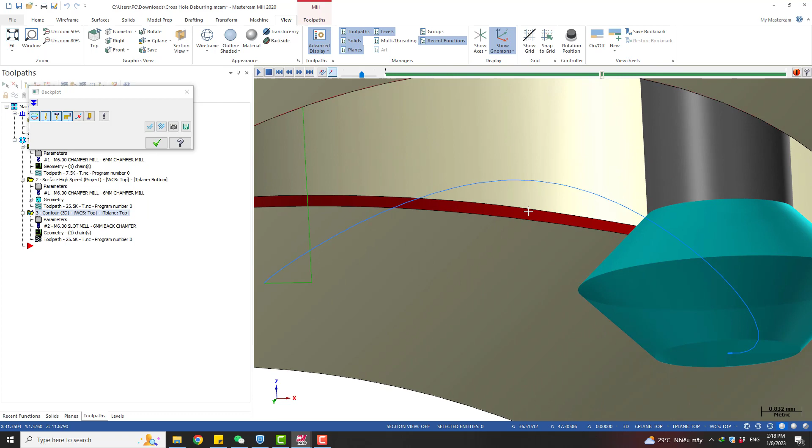I have another Mastercam video about cross-hole deburring, but on that video we used the lollipop cutter. Today is something different - we are not going to use the lollipop cutter anymore, but change to a back chamfering tool like this. You can see in this video I'm going to use a back chamfering tool, and it's going to cut like this, giving us a small chamfer here in red. This is what we want to get after we do the deburring operation.

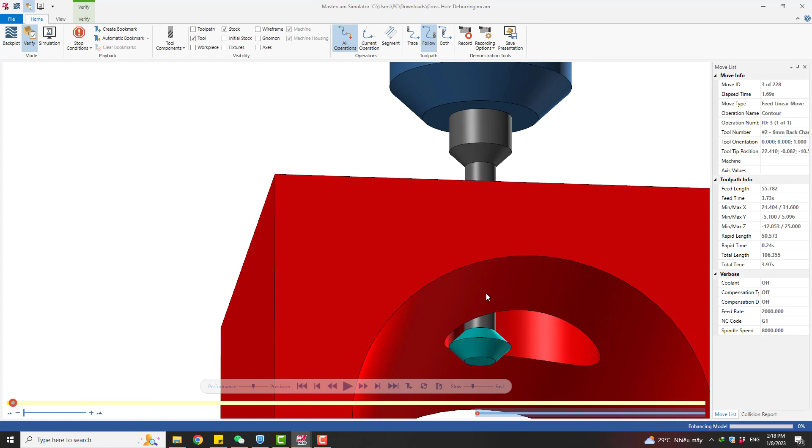Before we start, I can turn on the simulation so you can see how it works. This is the part and this is the chamfering tool, a back chamfering tool, and now I let it cut. Yeah, and this is what we get.

You can see the burr can be removed with this operation. We have a small chamfer here along the intersection between the holes.

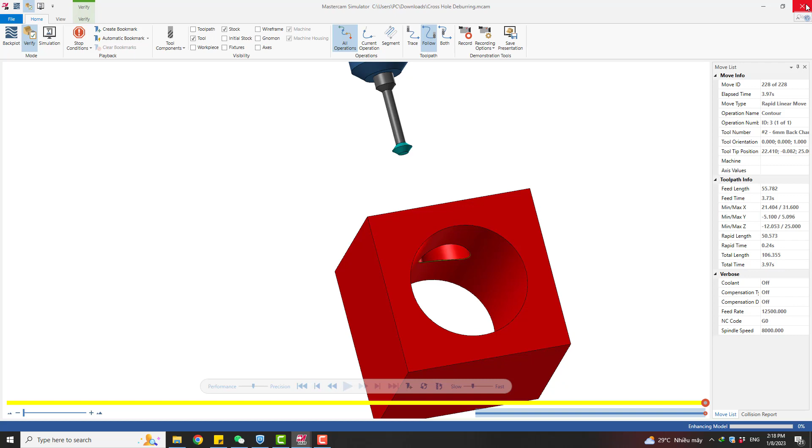We go to the level - I have something to show you first. Here's the level I use: the first level I start with has the part with the small chamfer, and the second level is the same part without the chamfer. This level I use for cutting simulation.

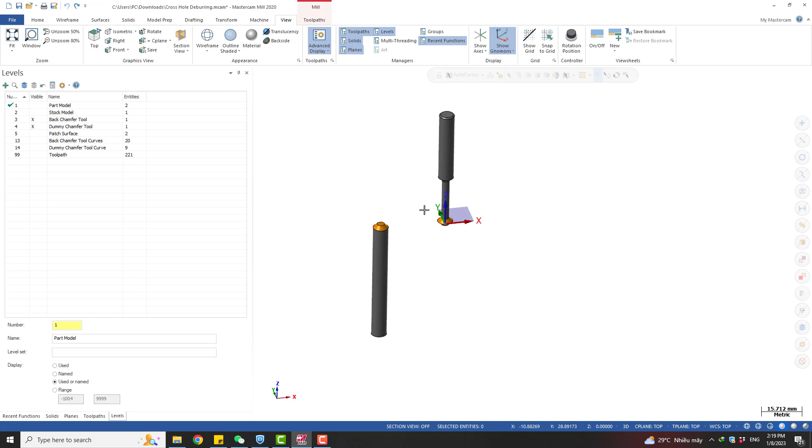On number 3 and number 4 I have two different tools. You can see on the right side I have a back chamfering tool - this is the real tool we use for the operation. And on the left side I have another flip chamfering tool with a flat tip here.

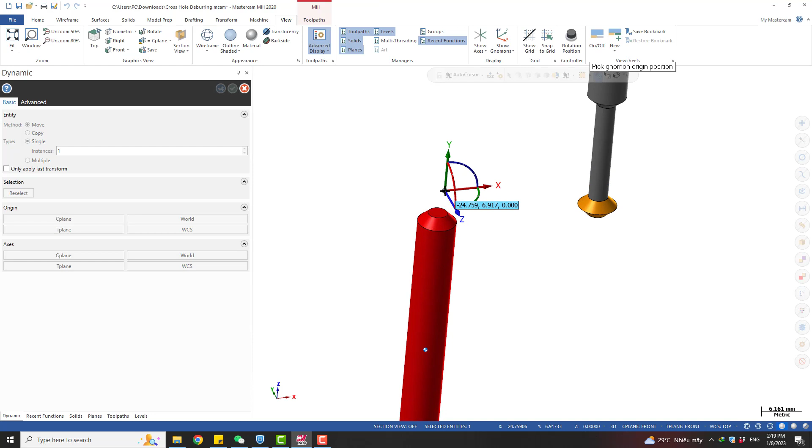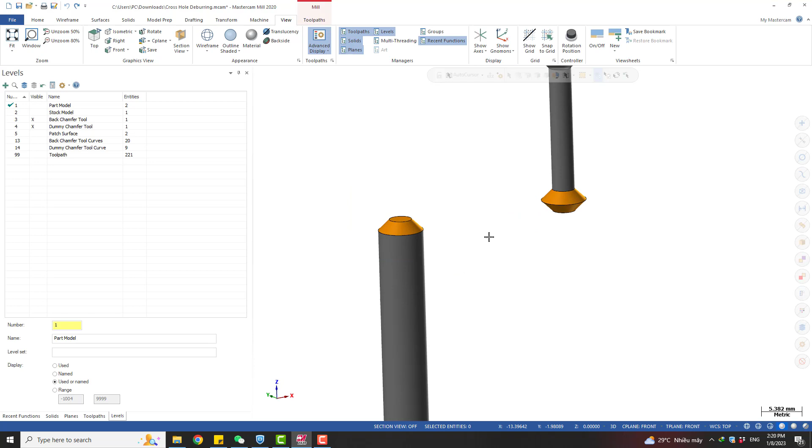Why do I need this one? I'm going to talk in detail about this later, but you can see when I merge this chamfering tool together with the back chamfering tool here. Did you see that? I turn on the wireframe so you can see. So I can say that the lower section of this chamfer tool is the same as the upper section of this back chamfer tool. You can see they are the same - the lower section and the upper section.

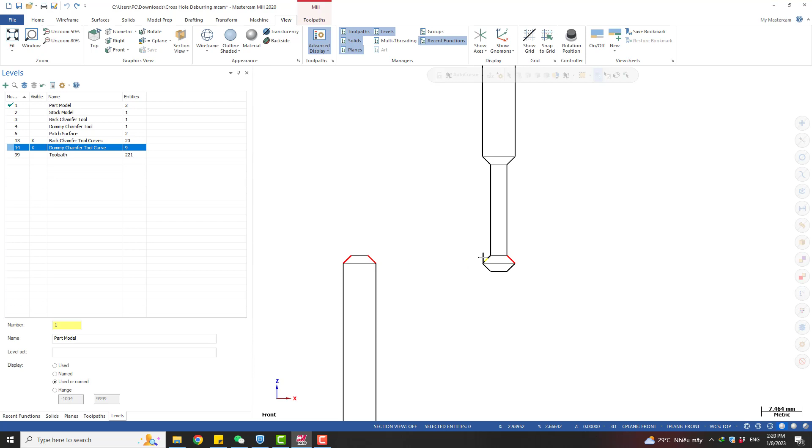I also have level 13 and 14, so you can see it clearly. This is the chamfering tool flip, and this is the back chamfering tool. This is the lower section of the chamfering tool, and it's the same as the upper section of the back chamfering tool. You can see it when I mark it here - they're the same.

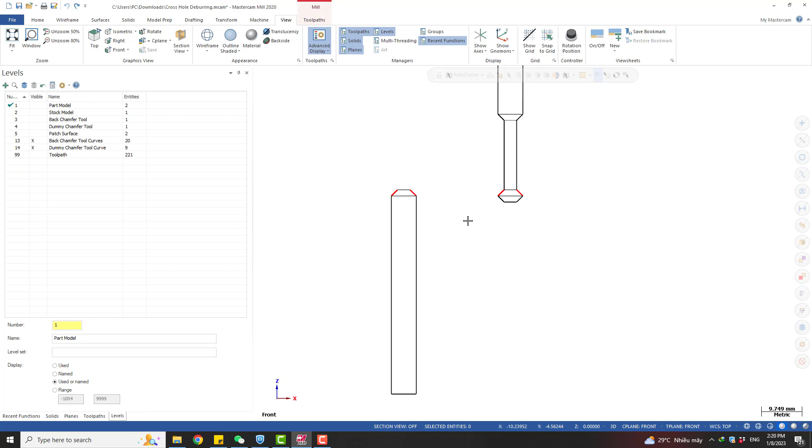Okay, I think so far you can see what I want to do now. I turn off them. I have another level, number 99, for storing the toolpath.

Okay, let's take a look at this chamfer. When you look at it from the top side, you can see it's totally undercut. That means you cannot reach it with a conventional tool. But try to look at it from the bottom and see.

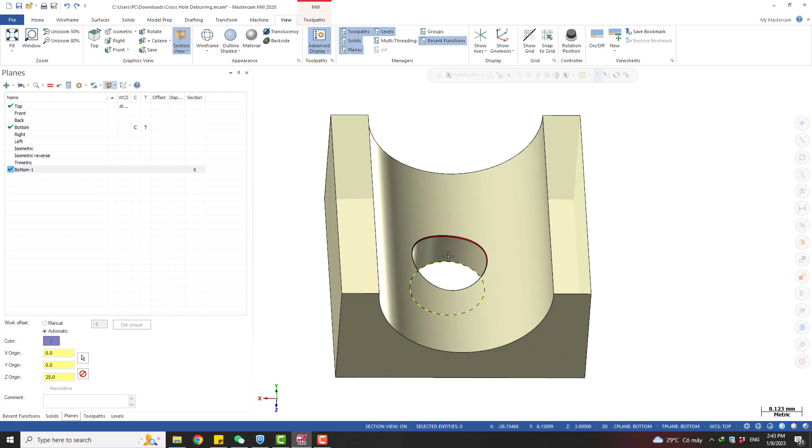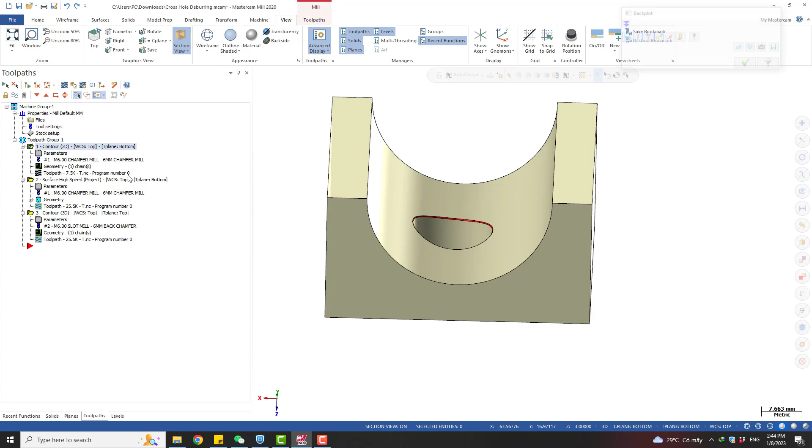Yeah, you can see that when you look at that chamfer from the bottom side, it becomes a normal chamfer, a 3D chamfer. That means you can cut it with a normal chamfering tool like this. Like what I did here - I made a 2D contour like this, and then I project this 2D contour onto this red surface using the same tool, and I got a 3D chamfer toolpath like this.

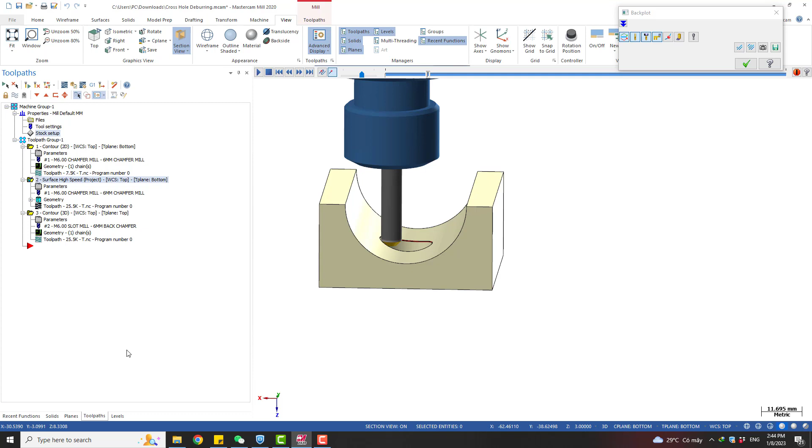You can see this one is the dummy chamfer I talked about before. I call it dummy because we just use it for calculating, and we are not using it in reality.

Let me show you again about that dummy tool. Yeah, this is the dummy tool we use - it's just a normal chamfering tool. Okay, and what we do with it is create this chamfering toolpath.

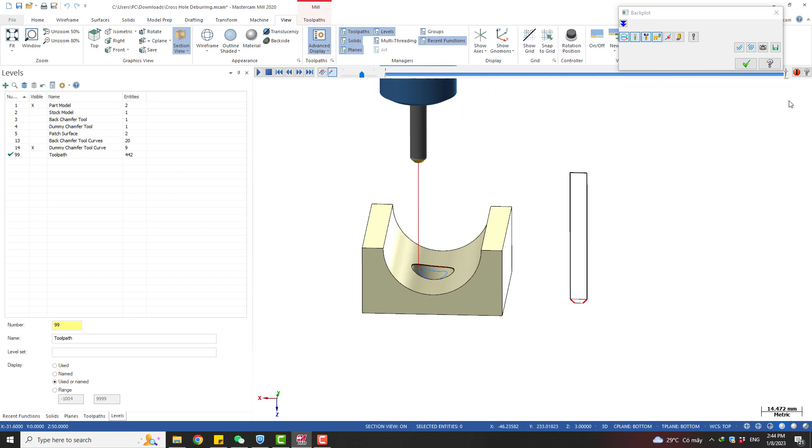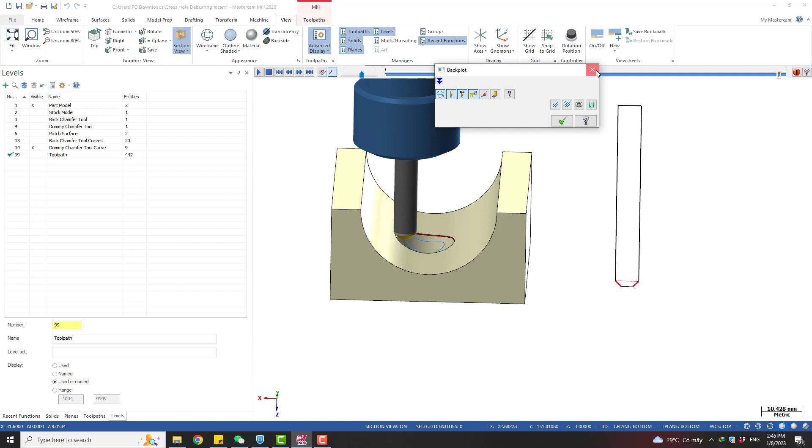After we get this blue toolpath here, you can use a very useful function called save as geometry. After you click on this and click the OK button, it will move this toolpath to a level and you can use it for whatever you want. I use this level 99, and after I click OK, I got something like this - I saved it before, this one is what I got. So we use the dummy tool to create a chamfering operation and we save that toolpath.

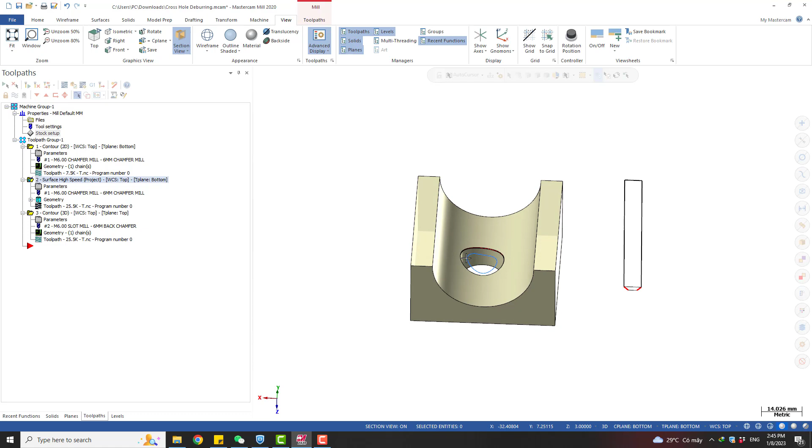Okay, and after we save it, we apply that chain we saved to this 3D contour. We go back to the top plane, turn off this one, and we create a 3D contour toolpath using a back chamfering tool.

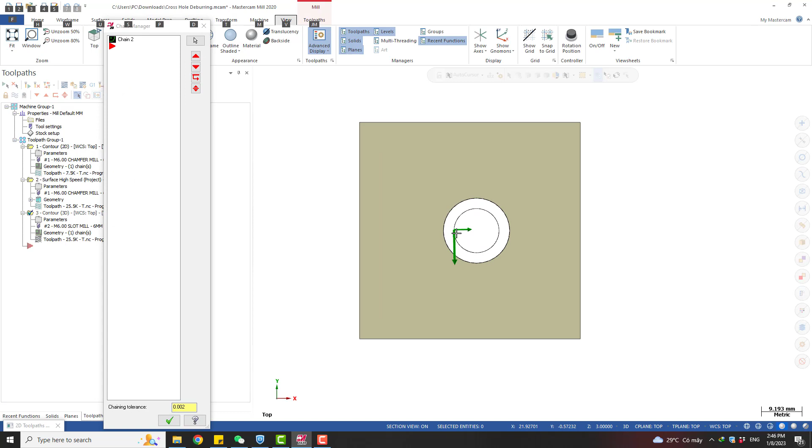You can see I make a 3D contour and look at what chain we selected. That's the one we saved from the last operation from the bottom side.

After we select that chain, we go back to the parameter. Remember to set the compensation type off because we want to cut it at the tool center. And you can see I have a gap in here in the depth.

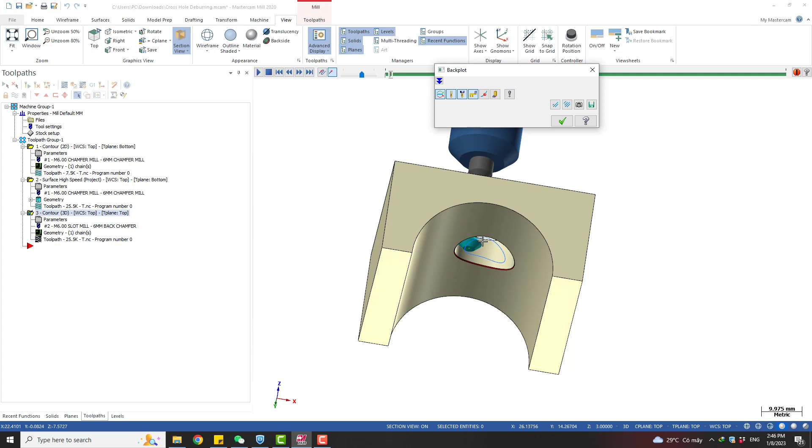Let's see when using no gap what happened. Yeah, if you don't want to use a gap, this is what you got. The bottom of this chamfering tool follows the chain we selected and it's not cut at the position we want. It cuts into the part, not making a deburring operation.

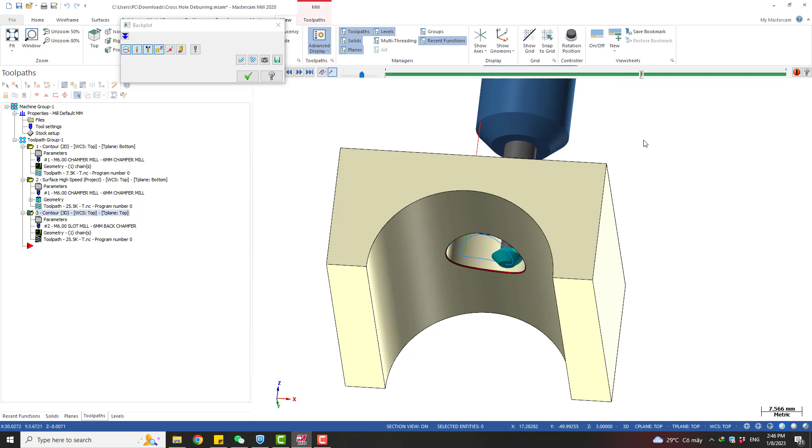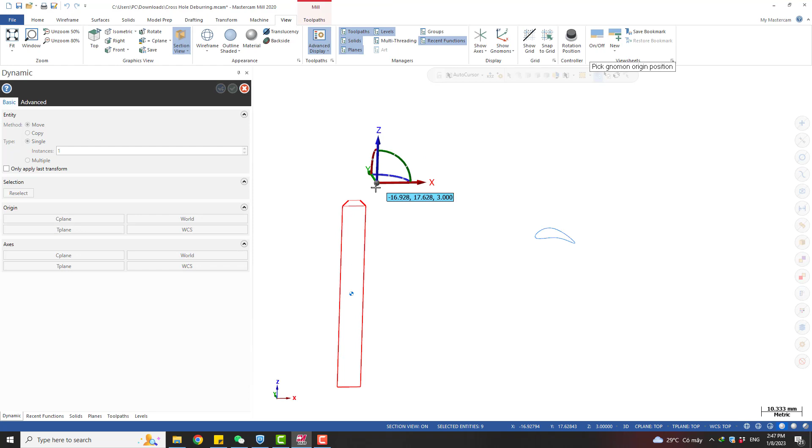So that's why we need to shift it down at the gap. How much? Okay, let's turn off the part and just keep the curve we saved. I turn on the dummy tool. You can see this is the dummy tool we created from the last operation.

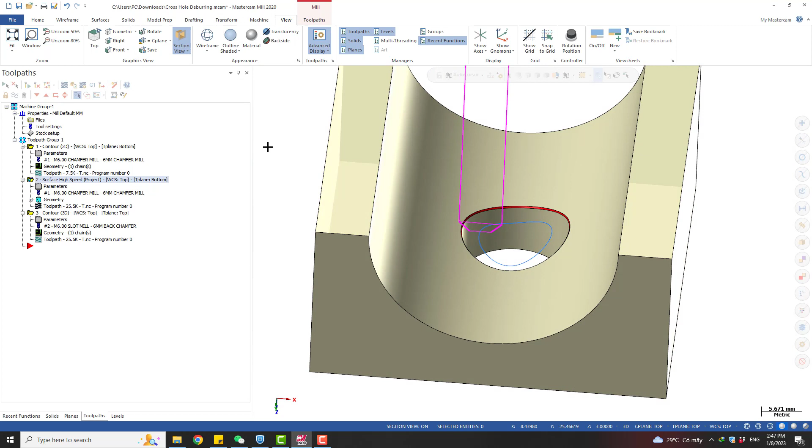Move to here. This is what we did. You can see this dummy tool we use it to create a toolpath. And if you just apply that saved chain to the new toolpath, this is what we got.

We still don't have a correct contact point, so we need to shift it down. How much? I'm going to show you.

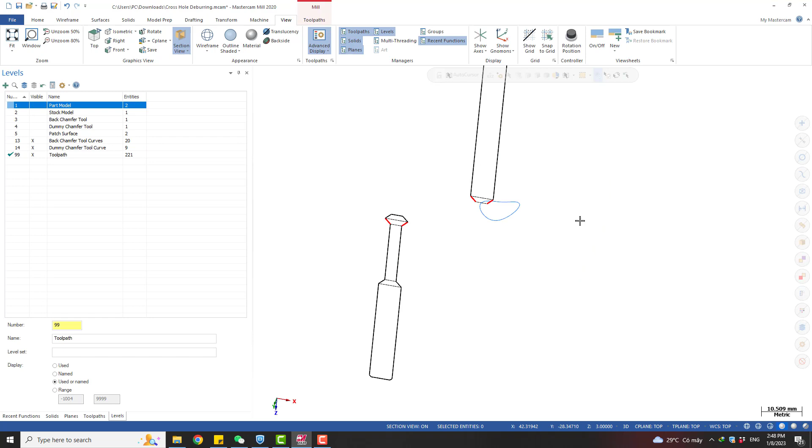We turn on the back chamfer, turn off the part. Now I move the back chamfer to here so you can see it easily. There will be touch.

So that's what we have when we use no gap. Yeah, you can see that.

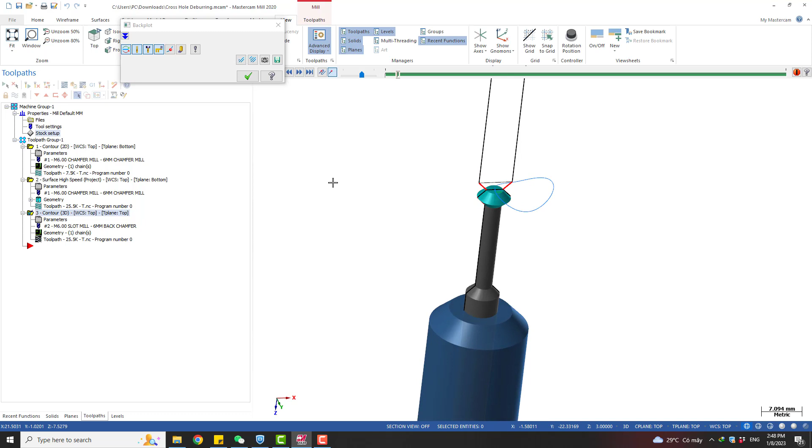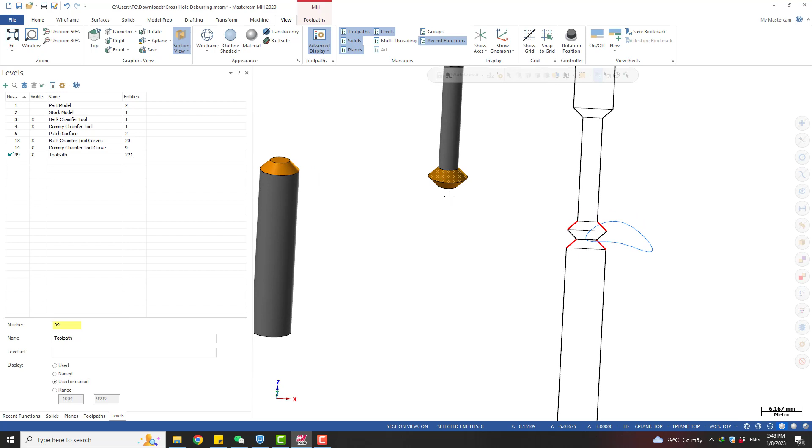The goal is you need to move the back chamfering tool down. As I talked about before, this lower section of the chamfering tool is the same as the upper section of the back chamfering tool. So in order to get a correct contact area, you need to shift the tool down.

So this red section, you can see this red section will become this red section. Yeah, so how much we need to check it.

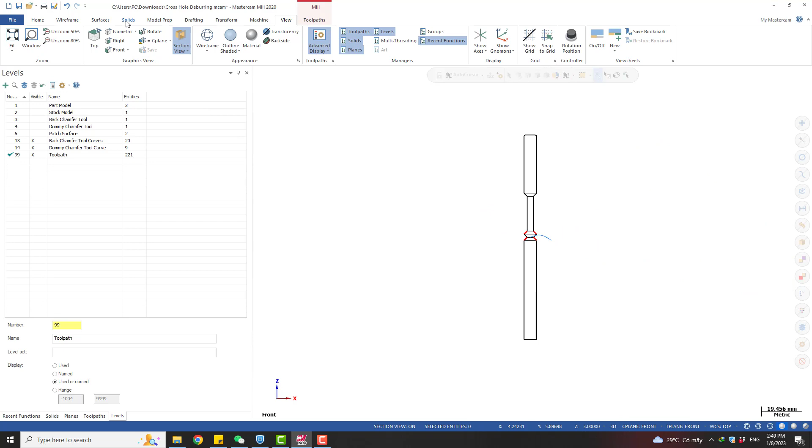I need to measure, so you can see it now. This is 3 millimeters. I need to move it down 3 millimeters.

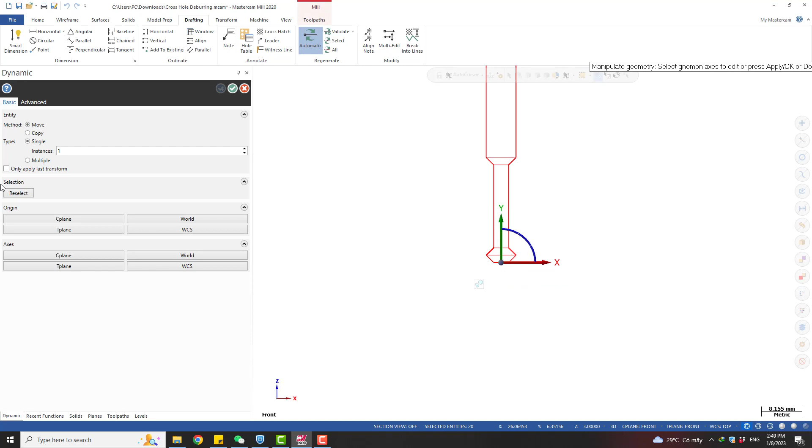Okay, turn off this dummy, turn off this toolpath. Okay, go back to the level and turn on this dummy, and now I will move this.

So this is what happened when we shift this tool down. You can see the amount, 3 millimeters. Yeah, this is no shift, and this is 3 millimeters. I will input 3 mm.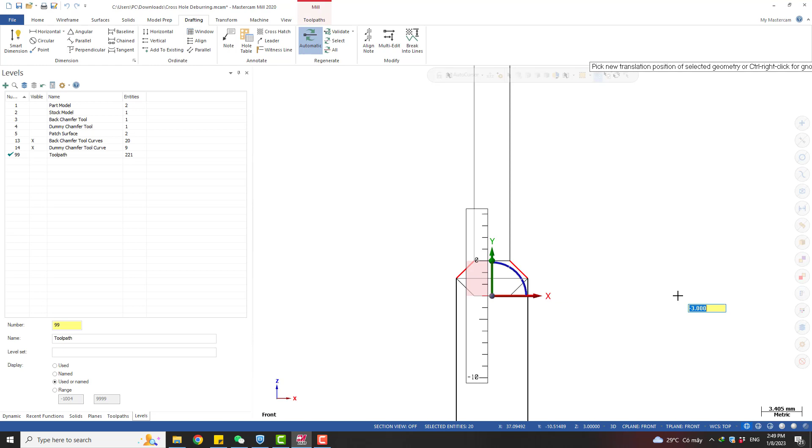So you can see now they intersect, two red sections become one. That means we have the same contact area. Yeah, you can see that.

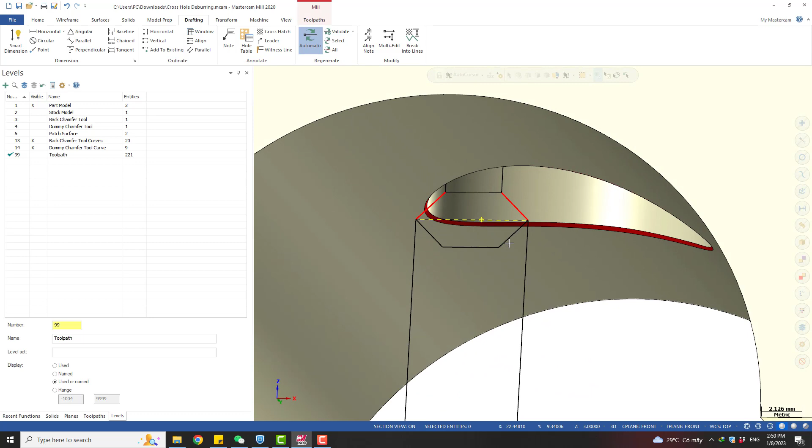Now the back chamfering tool contacts at the correct depth, and that's why you can see I input -3 here. That's the amount of the shift we need to apply to get the correct cutting. So that's what we got, right? Very easy.

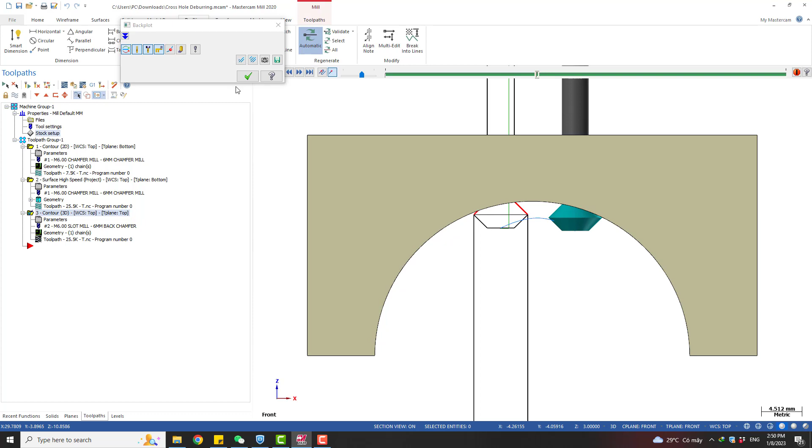Okay, and now I will go back from the beginning. I will do everything from the beginning. You can see there's something we need to take into account, not just select the tool. Okay, first I need to turn them all off.

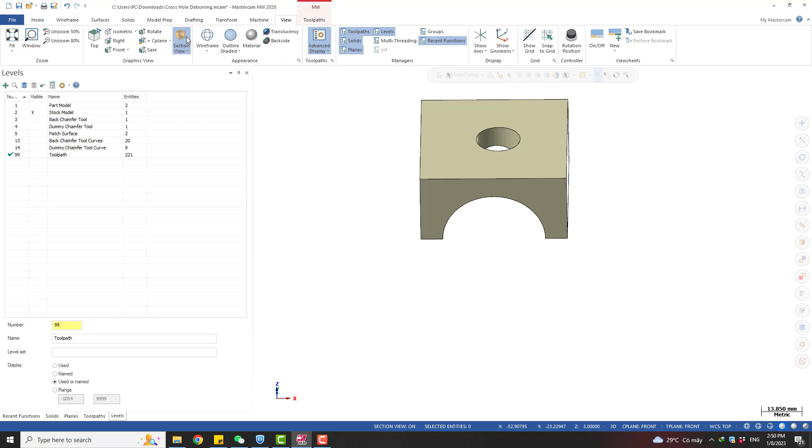This is what I want to keep. This is the part. Turn off the section view. Okay, so now I'm going to show you what we need to do from the beginning.

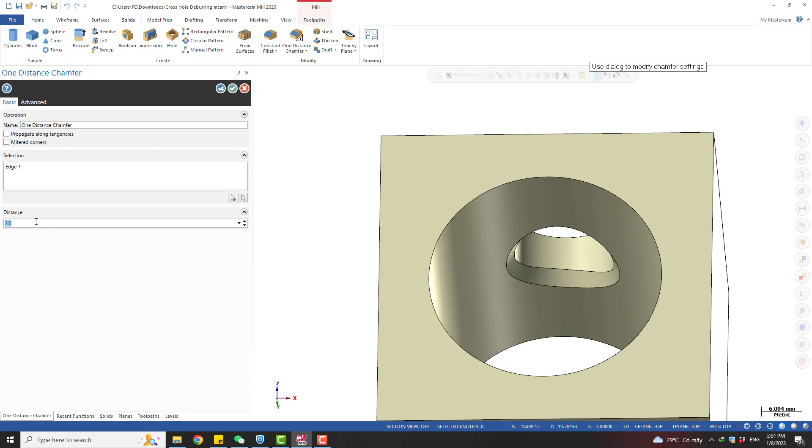First, we should create a chamfer here using the chamfer function. For example here, and you enter the amount of chamfer you want. In this case, I want a 0.2 chamfer. Okay, so we create a chamfer.

I will mark it with another color so you can see it clearly. Change face, change the color to red. You can see that. Okay.

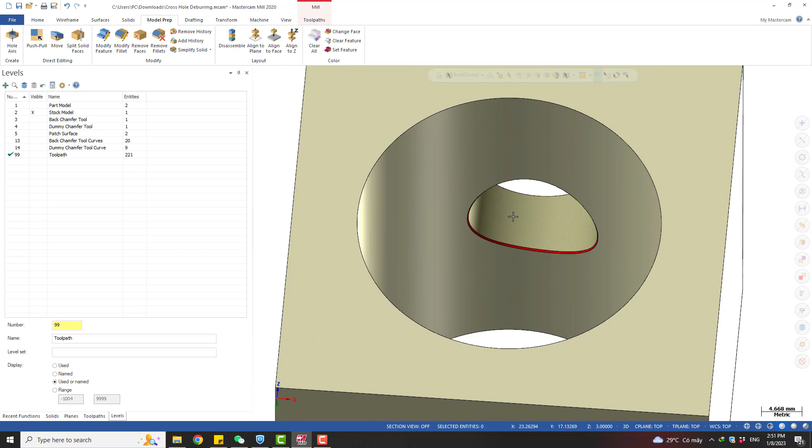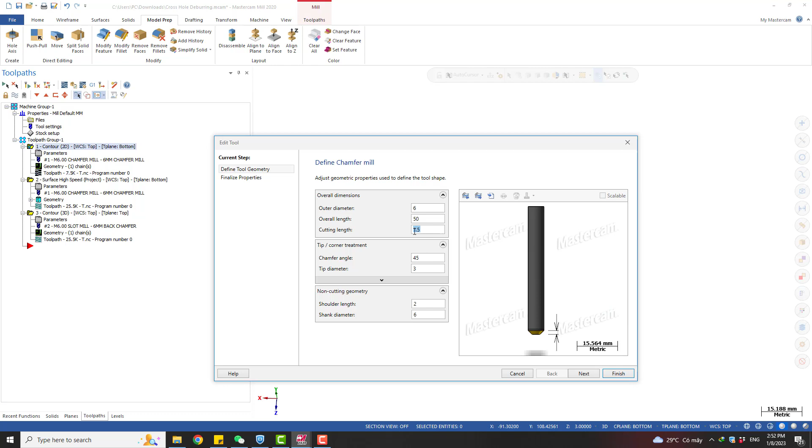After you create this chamfer, you should create a 2D toolpath from the bottom side. You can see this is the toolpath I created. The T-plane is bottom, which means we cut it from the bottom. This is the chamfer we created, a 6 mm chamfer with a 1.5 chamfer distance. It's the same with the back chamfering, the upper and lower section.

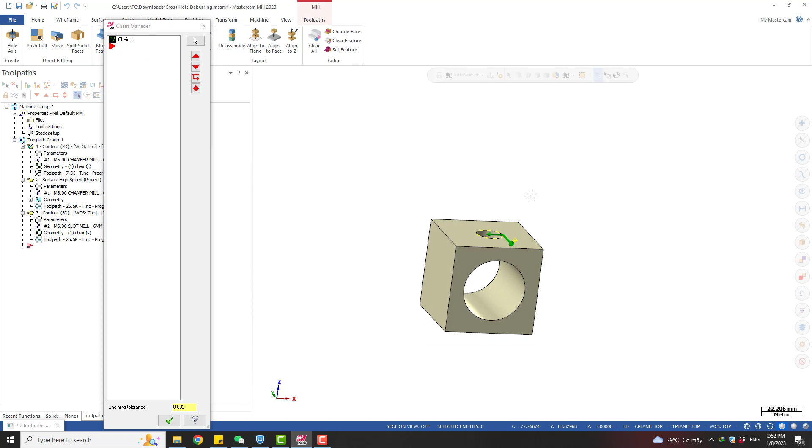After we create this 2D toolpath, we select the chain on the top here. This is what we look from the bottom. And we select this chain, which is the diameter of the hole on the top view.

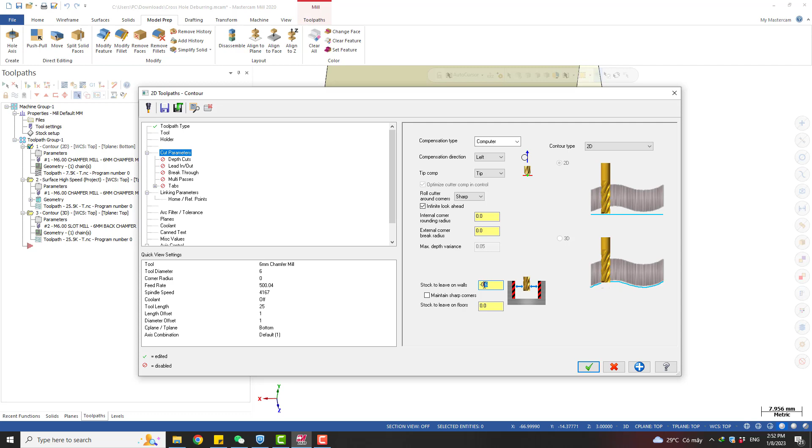Here you can input the stock to leave. You should input a negative amount, so in this case I use 0.6, to cut into the part. If you input just 0, the tool will contact the diameter and there will be no chamfer, so it should be some little amount into the part, like this.

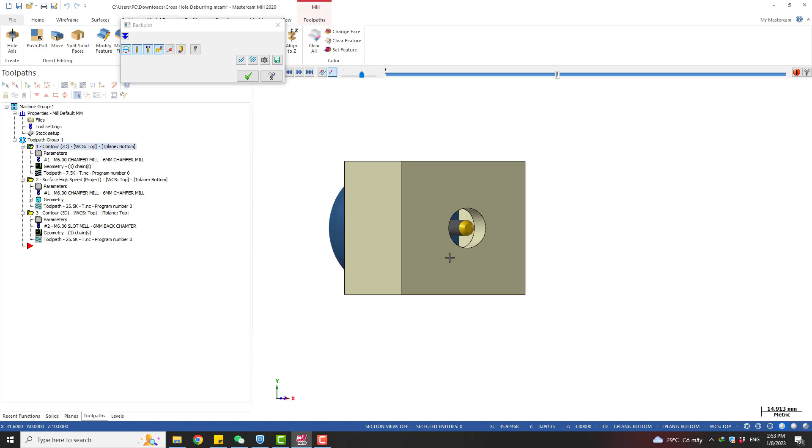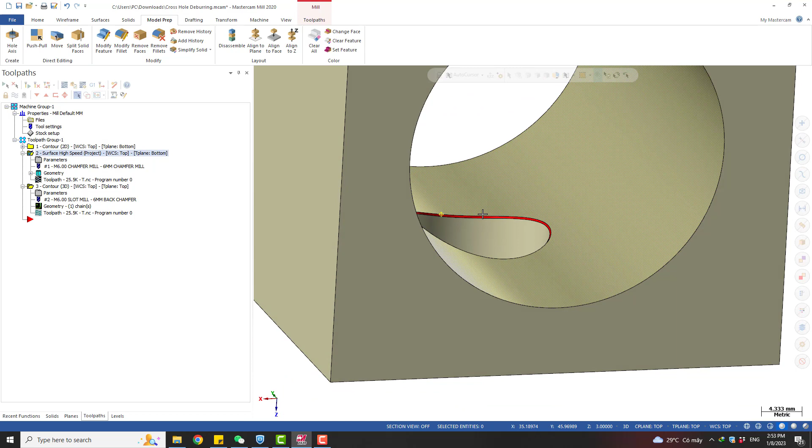So after that, what you want to do next is a projection. This project toolpath makes sure that the tool contacts your part at the correct chamfer distance. I don't think a 3D contour is a good idea to do it. I recommend you use a project toolpath. This is a very good tool to do this.

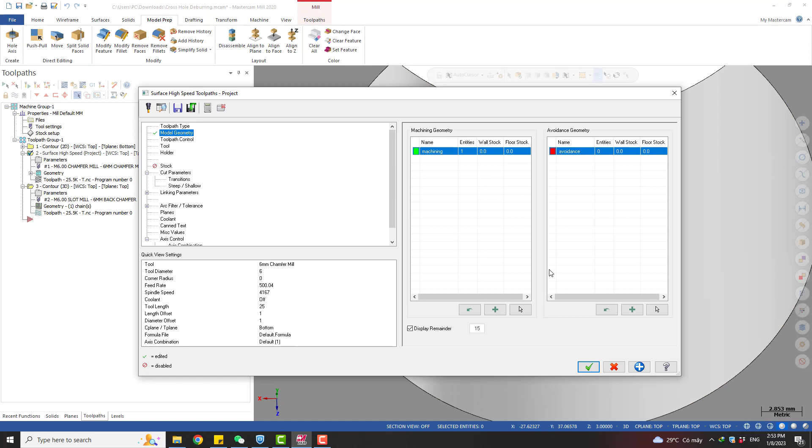With this project toolpath, what we're gonna select is the chamfer we just made. With the same tool, this 6 mm chamfer, using the same tool to project to the surface. This is what we got. You can see now the tool is contact to the chamfer face.

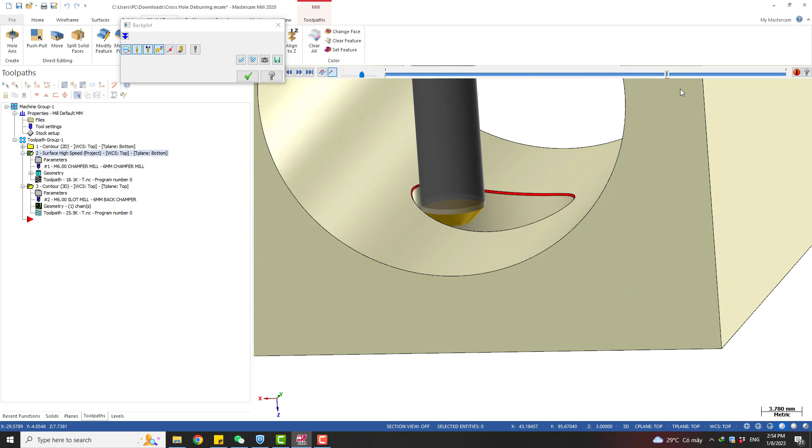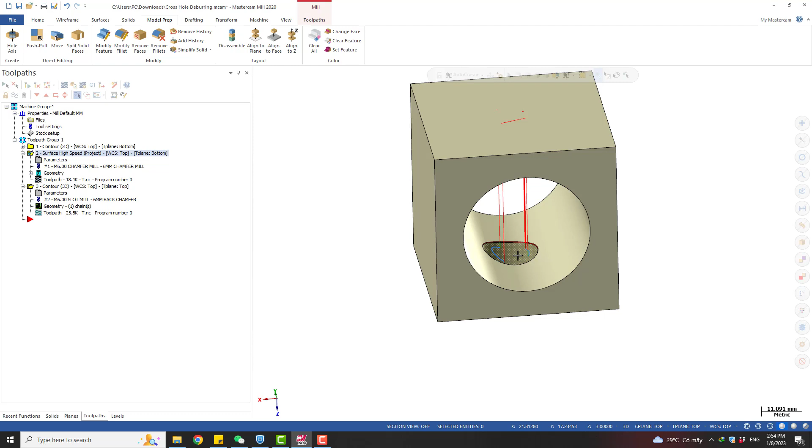But look at this, we don't have a complete cut. I think I already told you about one thing in another video, but what we need to do in this case to get a complete cut is you can see this interruption. We have some interruption in this area. We don't have any toolpath here, so what we need to do is create a surface. I call it a patch surface.

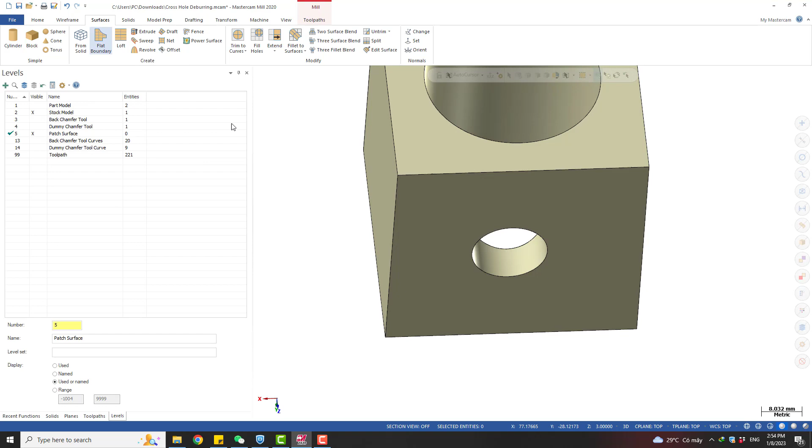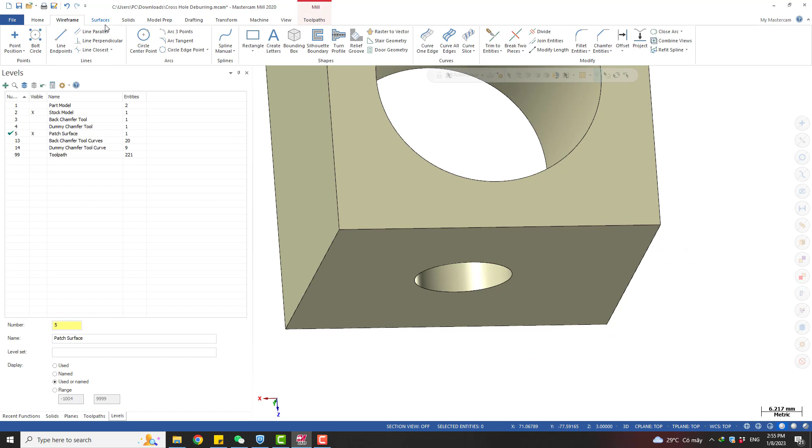I don't know what happened with the toolpath, but I think it needs something to do the projection on, because we have nothing here on the hole. So when there's something wrong with the projection, it cannot do the project, and it cannot give it a toolpath, so we're gonna make a surface here.

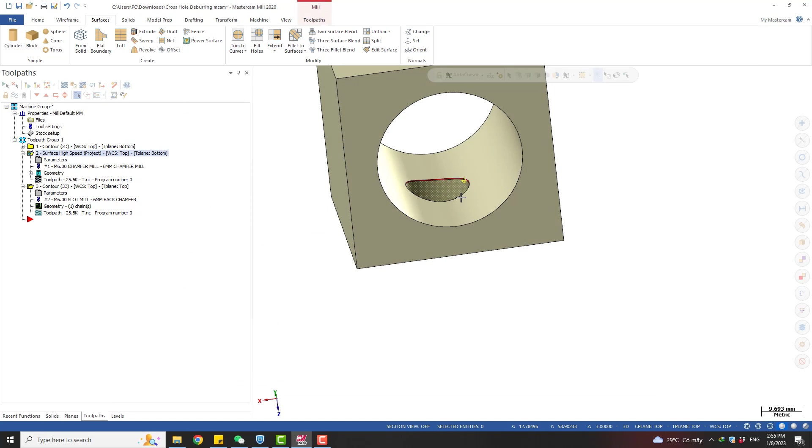And we go back to the project toolpath, include it - that's one, include that one - and we generate the toolpath again. You can see it's different. Now we have a complete toolpath, no interruption. I don't know why, maybe it's something related to the projection.

You can put it everywhere you want, not just on the bottom of this hole. You can move it up or down, just to make sure you have something in the hole here, inside the hole, so Mastercam can do the projection. After you create that patch surface, you have a smooth toolpath, no interruption, no missing toolpath.

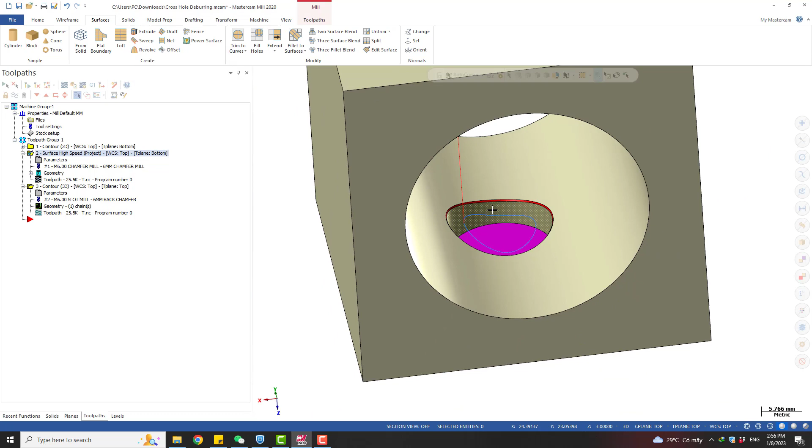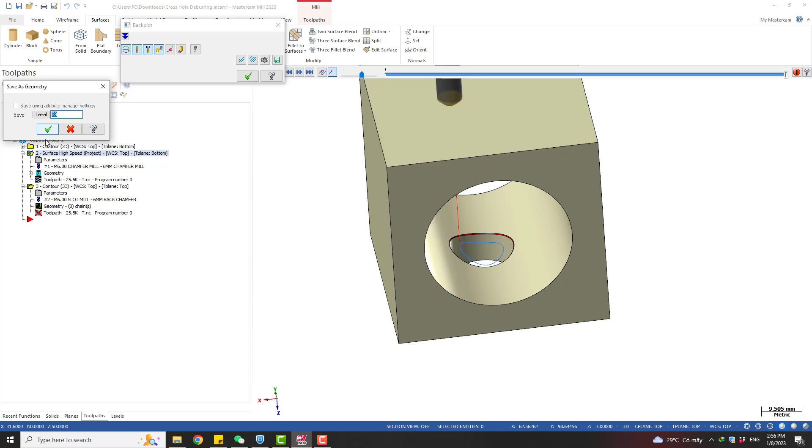Okay, and I can remove everything so you can see. After you got the project toolpath like this, the next step is save it to a level. Click on this button and select the level you want. In this case, I'm gonna select 99, and we go back to level 99 and see if we got it.

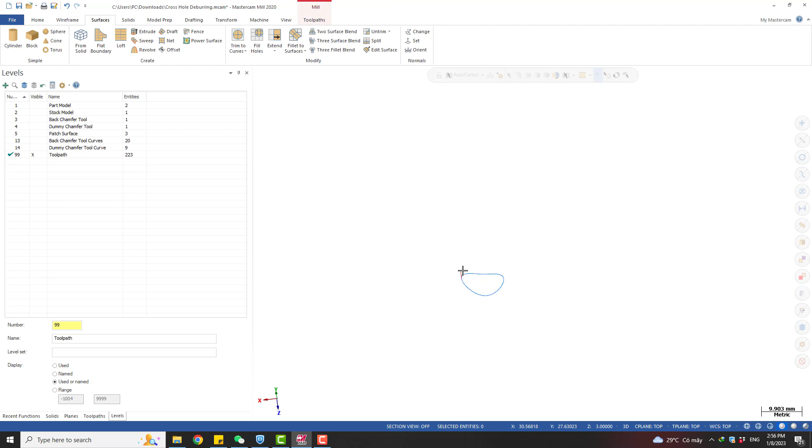Yeah, you can see this is what we need. And then now you can remove this movement also, this one - we just want to keep the cutting move. We remove the retract motion and plunge motion. We just keep this one.

And after that we go to the toolpath again and create a 3D contour from the top view. You can see this T-plane now become top, and those were bottom. This one becomes top.

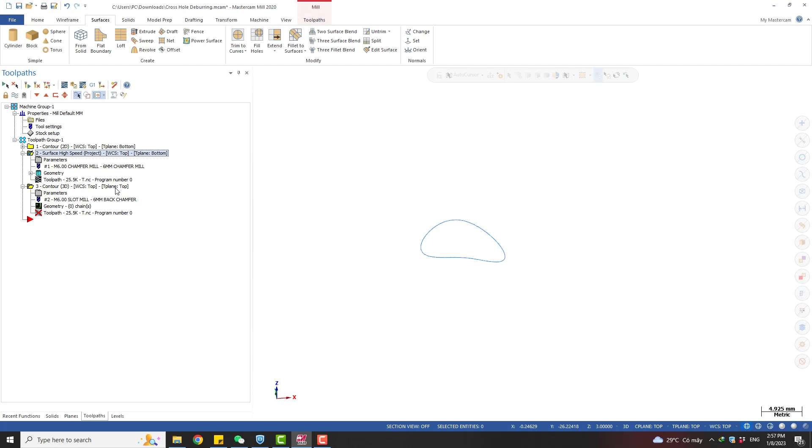We select the 6mm back chamfering tool we created. You can see...

This tool you can create by defining a T-slot cutter with top and bottom chamfer, or you can just make your tool, add a step file, and then save that step file, and use this function to import that step file. It depends what you want.

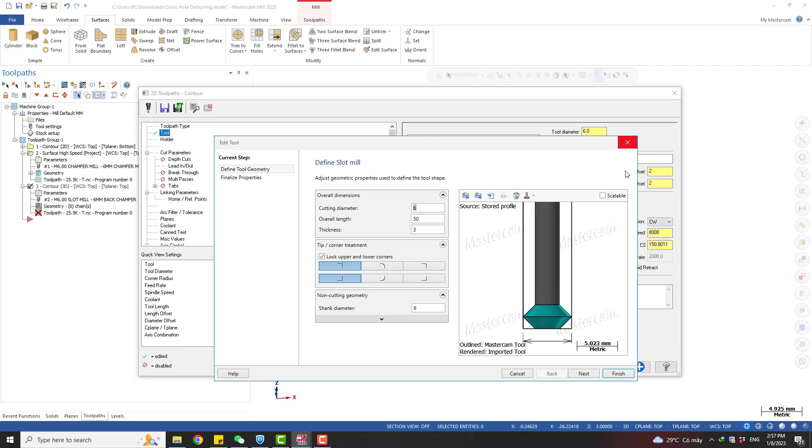Okay, just to make sure it's the same size as the dummy tool you use. Number one and number two need to be the same size. Okay, and go to change geometry.

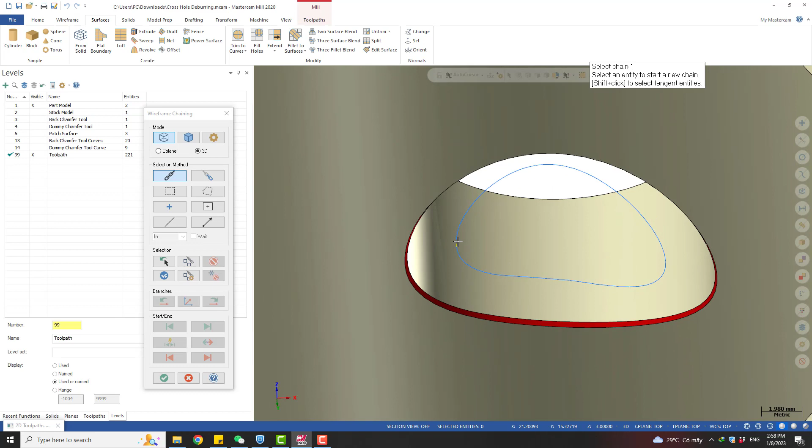Now it's time to select the curve we selected. Level, turn on the path, easy to see. You can select whatever point you want to start with. So I change it here.

I start the chain at this position. Okay, and now we move.

What happened? What happened? Plane top. It should be 3D, right? We go back again and see what happened. Maybe there's something wrong.

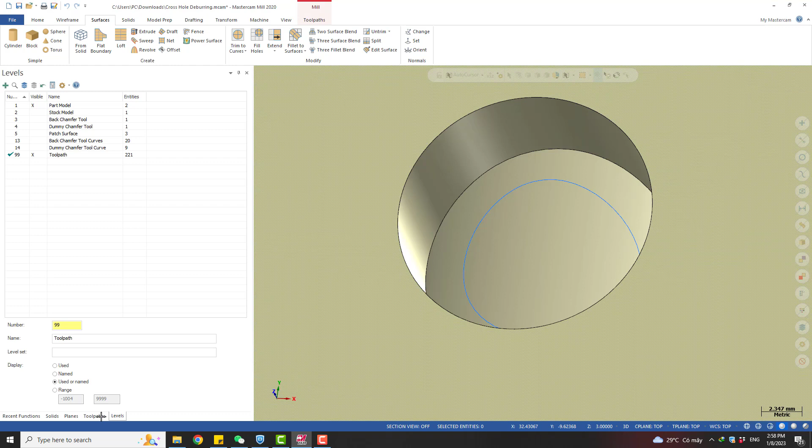Okay, we select 3D, and remember to set the compensation type off, because we saved the toolpath when the tool is in the center line of the tool. So in this toolpath we need to select off here and go to the depth.

Here we should input the shift amount. As I told you before, it should be 3mm. You can input -3 here. It depends on you, it's not important.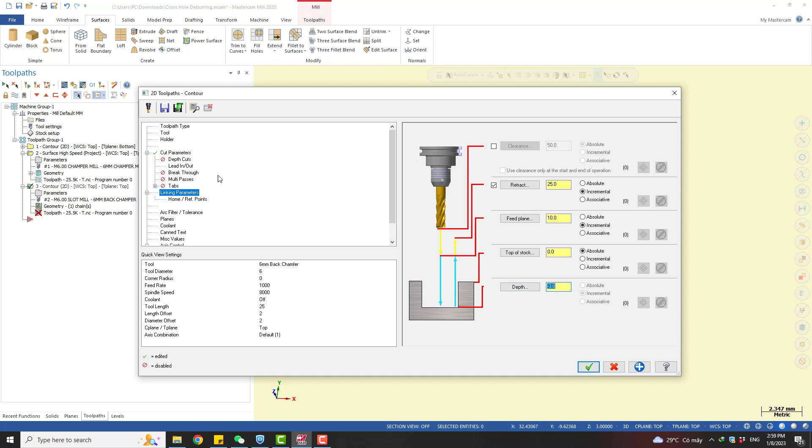I want to apply some lead in and lead out for the tool, so I can input here. You can see this is a perpendicular 1mm motion for lead in and lead out, the same thing. Okay, and then calculate it.

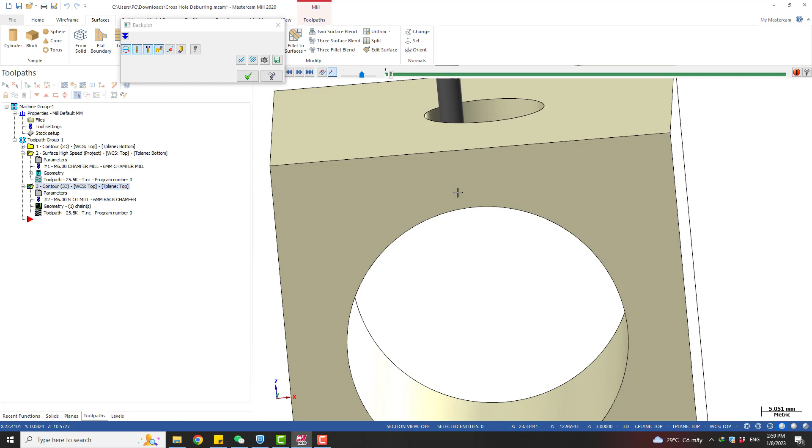Yeah, you can see the tool plug into the hole, and this is the lead in motion. It cuts the edge of the hole. Very nice, right? So this is what we get, very easy.

And there's something you need to remember. First, if you want a smooth and fine toolpath, you need to set the tolerance of the toolpath pretty tight. So for this project toolpath...

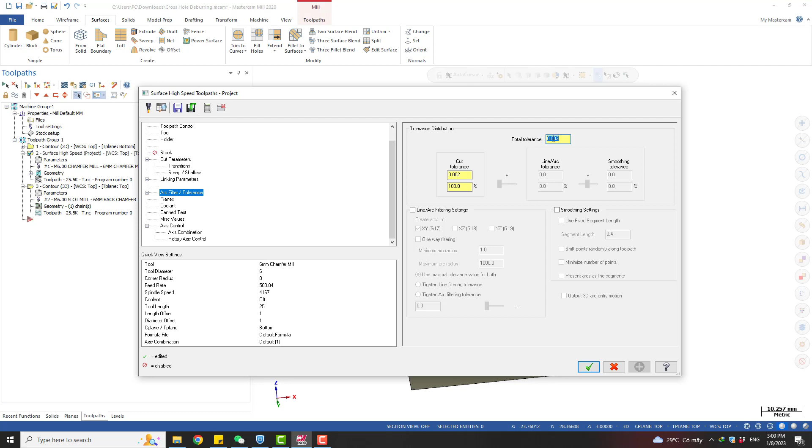You can see the tolerance is set very tight, yeah, you can see very tight tolerance. And also we do the same with this 3D toolpath. If you don't set the tolerance tight, you get a rough toolpath.

You can see this toolpath and this toolpath are very tight tolerance, cutting tolerance. So you can see the move is a very small move. So we get a smooth cutting.

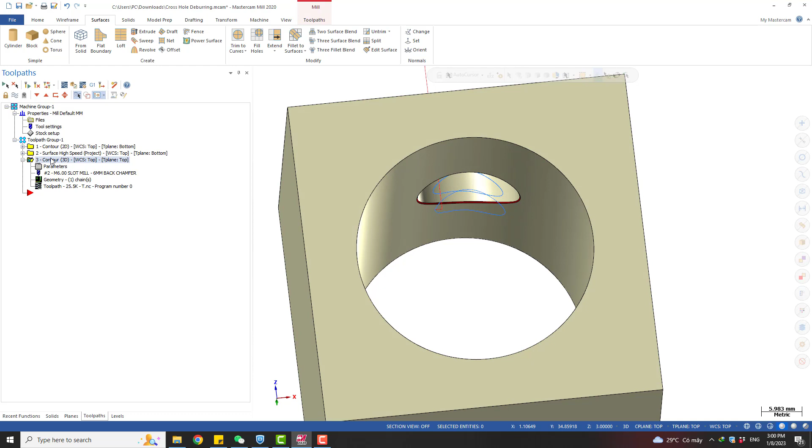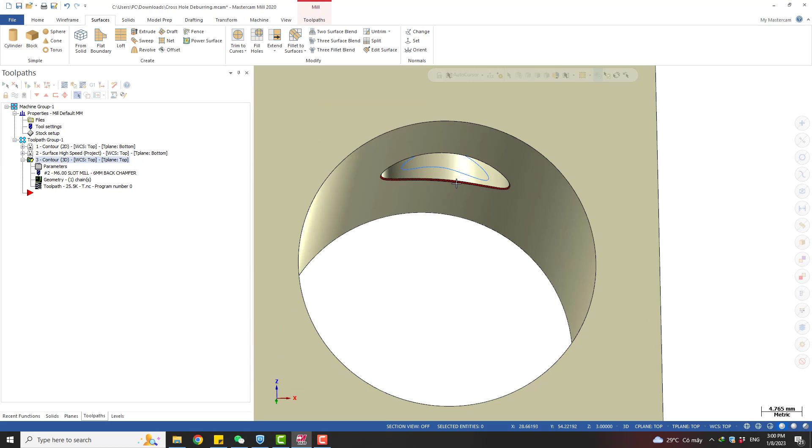And because this is a back chamfering tool, there are some cases you cannot use it. For example, if this intersection line is not shallow, it's so steep, you cannot use this tool.

This is a 45 degree back chamfer. It just can work well on some shallow surface.

You can see if this hole moves too far away to the side of this hole, you cannot use that tool. You need to use a lollipop cutter.

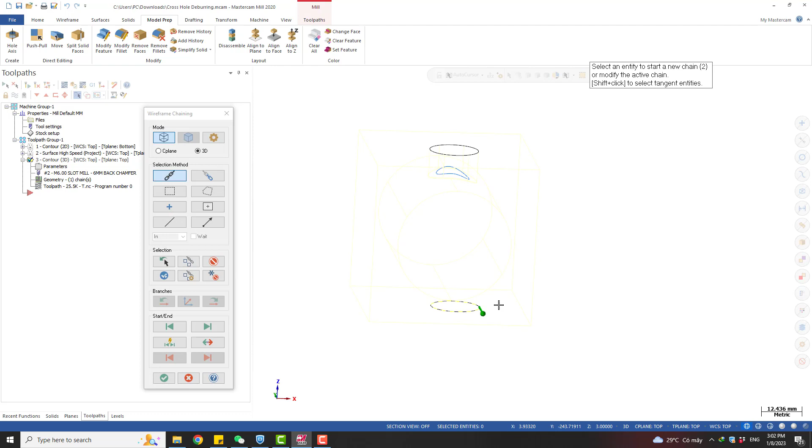So you can see in this case we have a shallow intersection line. We have shallow, and we can use this pretty nicely with the back chamfering tool.

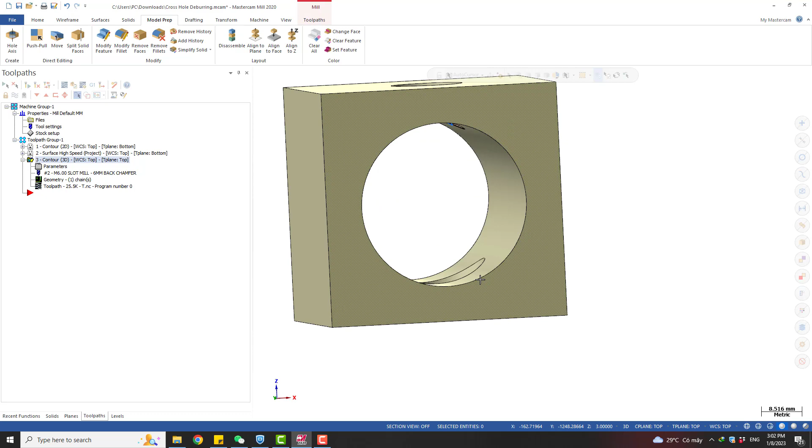But in this case, the hole was shifted to the side of this big hole, and you can see now it becomes the intersection curve. It becomes more steep. If we look from this direction, you can see it's more steep, steeper than this one.

And if you try and keep moving this hole far away from the center of the big hole, it's going to be something very steep.

And where you cannot use the back chamfering tool anymore, you have to switch to the lollipop cutter and do it in the other way.

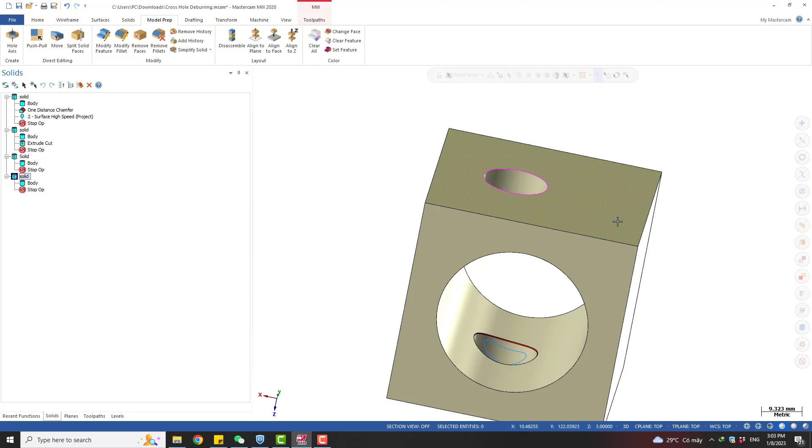Solid regenerate. You can see this is very steep. You can do the chamfer pretty nicely here, but when you go to here, the chamfer tool will cut into the part.

So it's not good to apply this tip on a hole like this. It's too far away from the center.

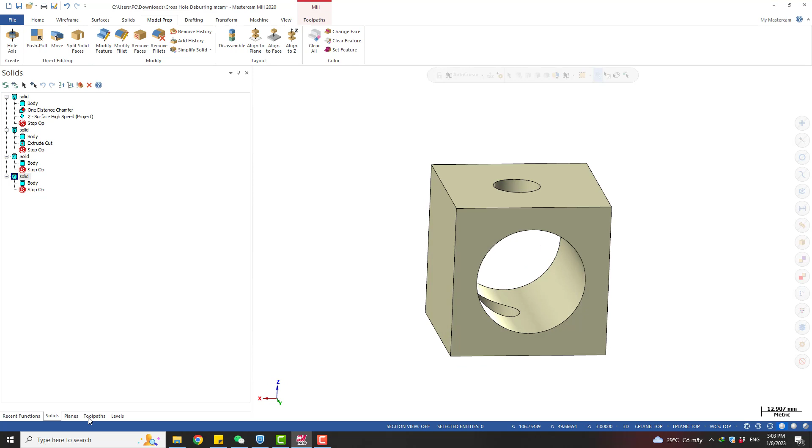Okay, so that's all for today. I have some difficulty in demonstration, but I hope you can understand what I mean and what I wanted to show you, and I hope it can be useful in some cases.